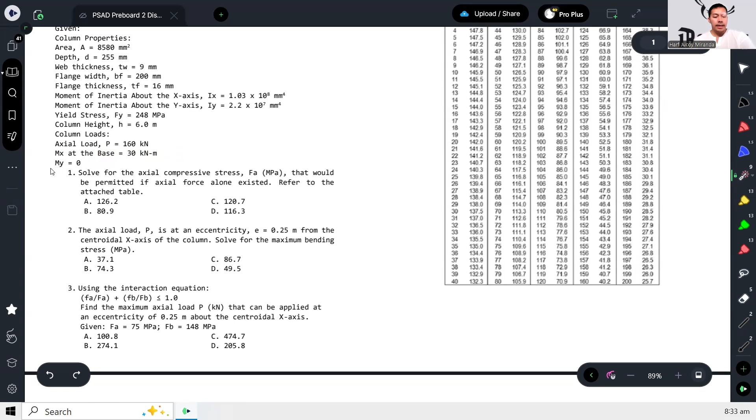So the questions are, solve for the axial compressive stress FA that would be permitted if the axial force alone existed. Refer to the table. So basically in the table, this is telling us that the allowable stress can be calculated using the effective slenderness ratio. So kailangan lang natin kunin yung effective slenderness ratio nitong column na ito para ma-identify natin kung ano yung FA or yung axial stress.

Axial compressive stress. So to do that, we need to define which axis will govern. And remember that in calculating the critical slenderness ratio, we are looking for the largest value of the slenderness ratio. So lagay ko lang dito sa gilid para lang malinaw, ang Kx natin ay 1. Tapos ang Ky natin ay 1.2.

Sinabi niya na yung length ng column, ito, 6 meters. Tapos about the y-axis daw, yung column ay naka-brace sa mid-height. So ibig sabihin, pagdating dito, yung length natin ng column ay kalahati na lang. From 6 meter, magiging 3 meters na lang. Pero dito, it's going to be still 6 meter kasi walang bracing.

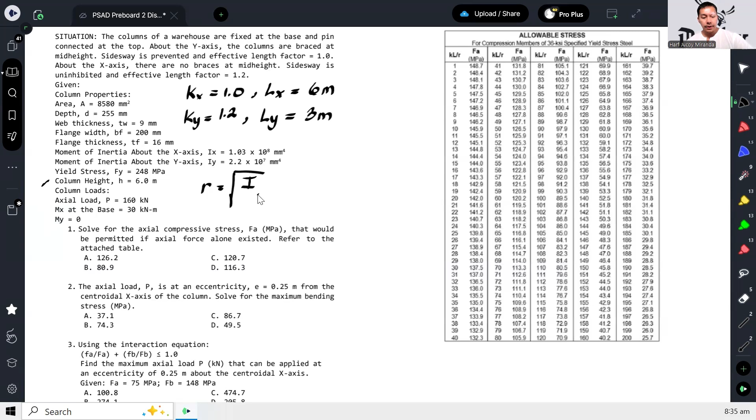Alright, so meron tayong K, may L. So R na lang yung wala. To calculate R, reminder, R is just square root of I over area. So we can define also Rx and Ry. Given naman yung mga I nila. So let's calculate that.

So square root of, let's start with Rx. 1.03 times 10 to the 8, over area, 8,580. So our Rx will be 109.57. And then yung Ry natin, this is 2.2 times 10 to the 7. So 50.64.

Ibig sabihin, let's calculate slenderness ratio about X and slenderness ratio about Y. Nagkabaliktad na side sway is prevented and effective length factor is 1. So dapat dito nga yung 1.2. May dapat dito yung 1.2. Kaya hindi, so dapat ito ay 1.

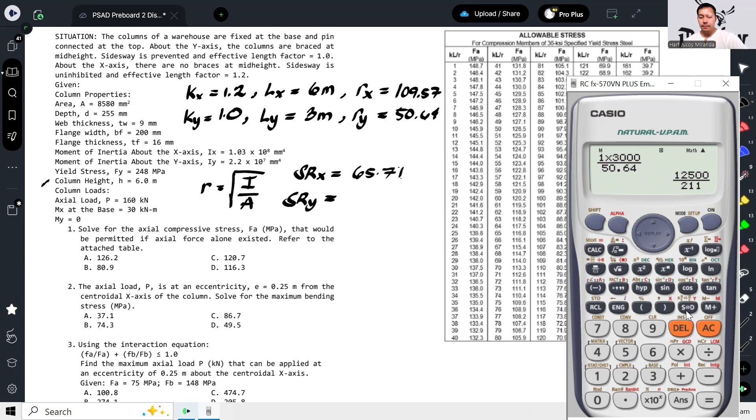If that's the case, this is for slenderness ratio about x-axis, Kx Lx over Rx, so 65.71. And then for Y, we have 3,000 ito, and then this would be 1, 50.64. So this gives us 59.24. Okay, so therefore, in this particular item, the governing or critical slenderness ratio is 65.71.

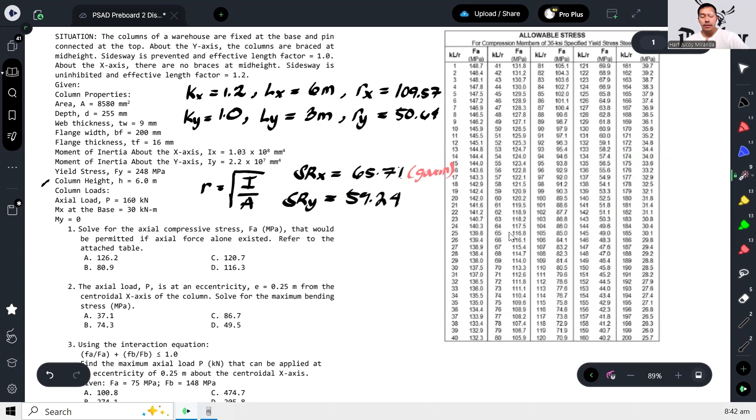So ito yung governing. And dito, ideally, kailangan natin i-interpolate yung values dun sa table. So because this is the governing 65, so it should fall under this item, between 65 and 66. So it will follow na yung FA natin will be between 116.8 at 116.1.

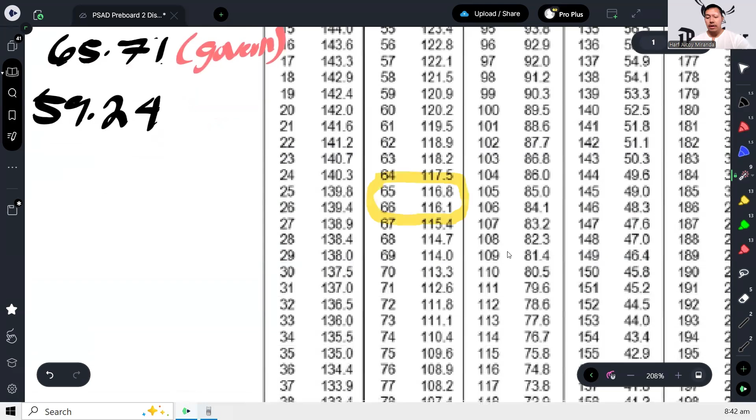Ito naman, pagdating sa board exam, kapag nakuha mo na yung KL over R, tapos binigay yung table, tapos tinanong yung choices, kung makikita nyo sa choices kasi, yung 116 dyan, nag-iisa lang. Kaya, you can already use this as your answer. To save time.

But if you want to interpolate, pwede naman. So again, you can just go to mode statistics. You have 65 and then 66. And then you have 116.8 and then 116.1. Tapos regression, we need y hat. Tapos sa harap niya, lagay mo yung 65.71. And that confirms na yung value natin is 116.3.

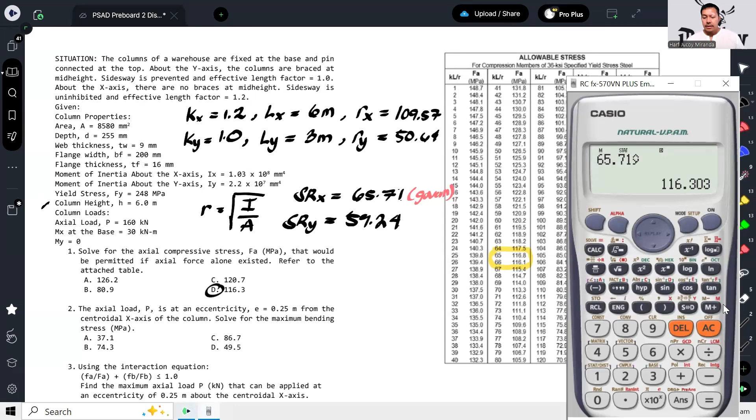So anyway, like I said, kapag nakuha nyo na nga yung critical slenderness ratio at check nyo na kagad yung choices, kapag isa lang naman dun yung nasa range na to, edi yun na yung sagot. Okay, next. The axial load P is at an eccentricity 0.25 meter from the centroidal x-axis of the column. Solve for the maximum bending stress. So ano naman, maximum bending stress. Ibig sabihin ko, ito yung column natin.

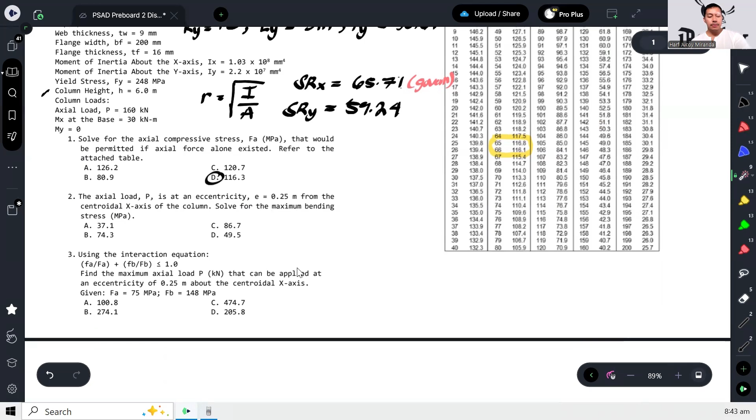Yan yung column natin, ano? So di ba ito yung y-axis niyan? Ito naman yung x-axis niyan.

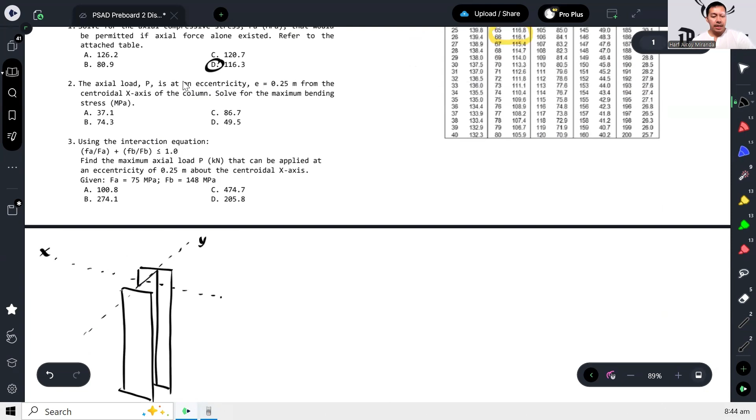Okay, so sabi niya, yung P daw is eccentric from the centroidal x-axis. So ibig sabihin yung P natin is somewhere dito. Okay, so ito yung eccentricity natin.

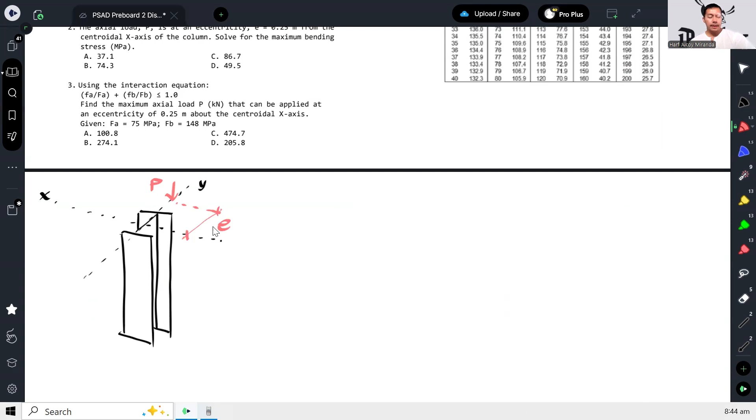Okay, now because of that eccentricity, a moment will be produced here, no? Moment. At yung moment na yon is equal to P times E. Okay, at tinatanong lang sa atin, ano ba yung maximum bending stress?

Okay, so ngayon dito, you have to take note na meron din daw applied moment sa bottom. No, meron din daw moment dito sa bottom, at yun ay 30.

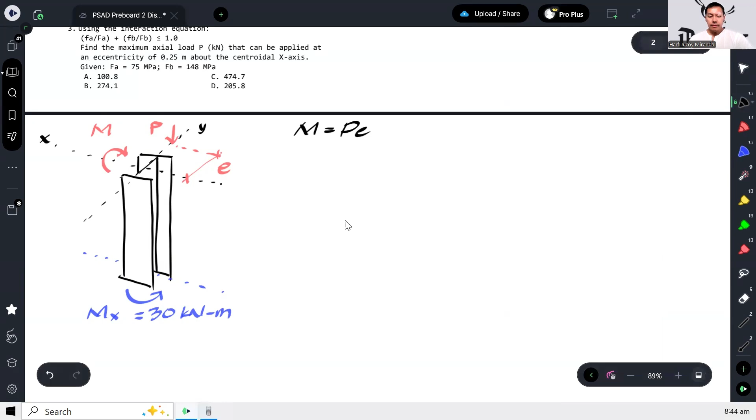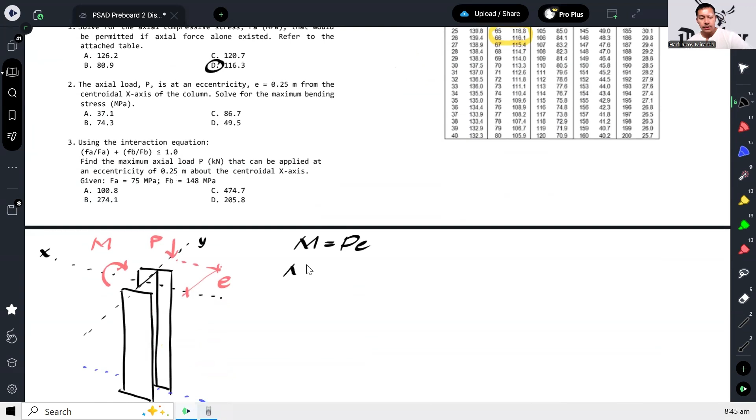Okay, so moment about X, sa bottom. So ngayon, let's check. Dito sa ibabaw, yung P na in-apply, which is 160, now let's calculate the moment it will induce. So 160 multiplied by 0.25 yung eccentricity, this will give us 40 kilonewton meter.

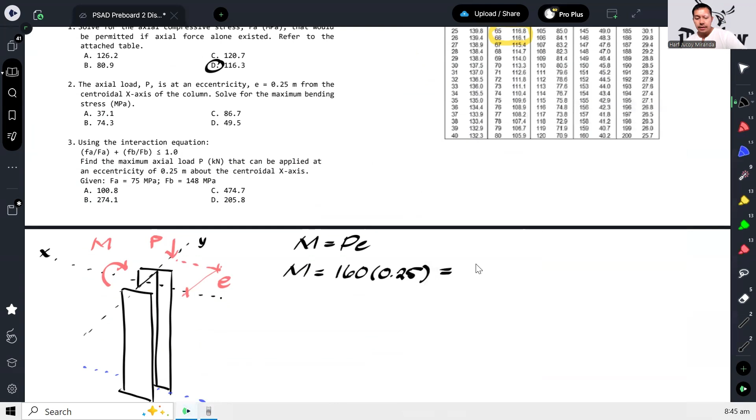Okay, now dito medyo merong confusion yung iba. Paano po ba ang gagawin dyan? May 40 tayo na moment sa ibabaw, tapos meron ding 30 na moment sa ilalim. So pinag-a-add po ba yun? No, ano po ba ang gagawin?

So ang ginagawa po dyan ay you have to compare only. No, kung sino yung mas malaki, yun yung mag-govern na moment. Hindi yan pinag-a-add. Kasi ang idea lang yan guys ay, for example, no? Ito yung column natin.

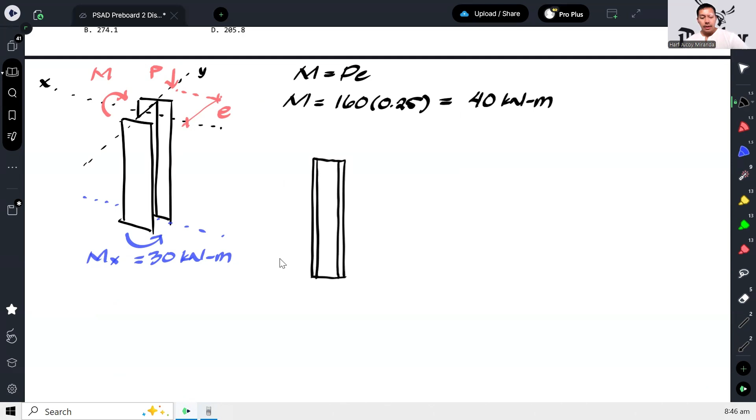Yan kunwari yung column natin, no, sa side view. Bali, meron naka-apply dito na 30. Okay, tapos dito meron ding naka-apply na 40. So kunwari lang, ganyan yung mga directions nila.

Okay, kapag din drawing mo yung moment diagram niya, ang idea lang nun, meron ka ditong moment na, let's say ito yung positive, ito yung negative. So meron ka ditong moment na positive, 40. Tapos dito meron kang moment na also positive, 30.

Ayan, okay? So ganyan lang yung moment diagram niya. No, so parang ito yung moment diagram. Okay, so ganyan yung idea nun. Alright, so ibig sabihin, hanapin mo lang yung maximum moment.

So ngayon, you might be thinking, paano kung magkaiba ng direction? Paano kung halimbawa, iba yung direction ng ibabaw tsaka sa ilalim? Well, mangyayari lang din ulit. Pwede rin kasing ganito yung maging moment diagram mo.

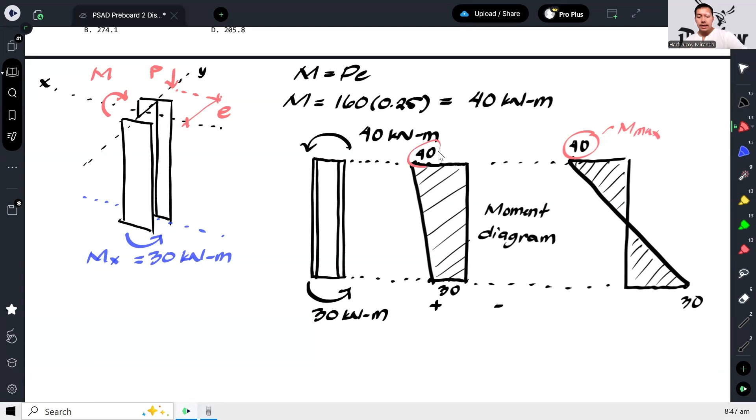Halimbawa, ito yung 40, tapos kunyari, iba yung direction ng 30, o di na sa kabila yun. Kasi ito pa rin yung moment diagram natin. And the point is, in our moment diagram, we are just looking for the maximum moment. And in this case, ito yung maximum moment natin. Regardless if this is of the same direction or different direction. Yun lang yung idea nun.

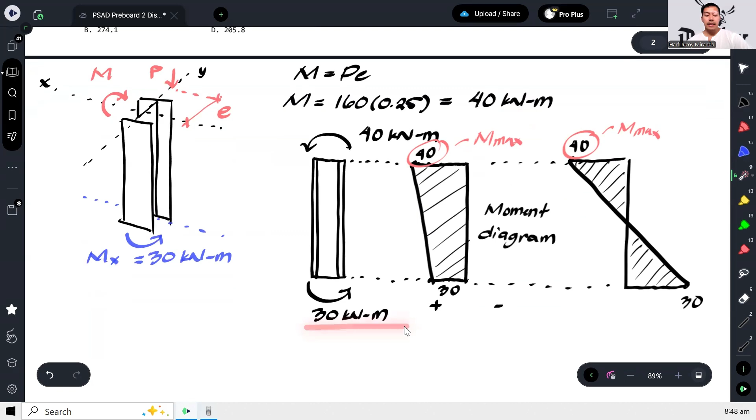So ibig sabihin, guys, ang tatandaan natin dito, kapag ang nakuha ko na moment, mas mababa dun sa given na applied moment, o di yung applied moment yung mag-govern kasi siya yung mas malaki yung reaction, no, siya yung mas malaking bending moment. Alright, so therefore, from here, all we have to do is to calculate the maximum bending stress.

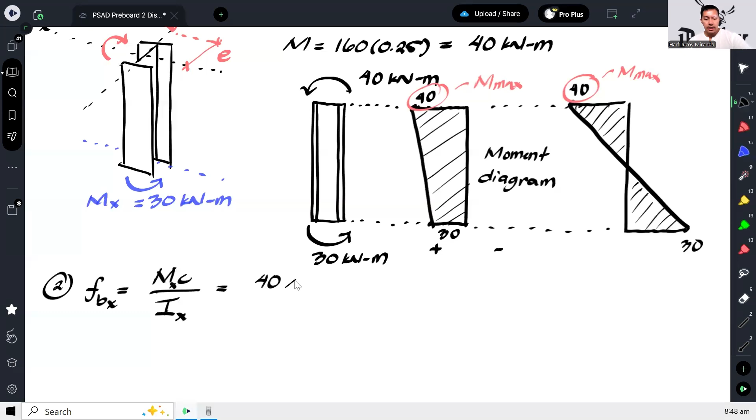So yun lang yung tinatanong, no? Bending stress. So for number 2, bali MC over I lang yun. Okay, and of course, dahil ito ay bending about x-axis, ito ay x. Parehas, no? Okay, so ang moment na gagamitin is yung 40. Gawin natin Newton millimeter. Tapos yung C natin dyan, D over 2, ano? Okay, kasi wide flange yan eh.

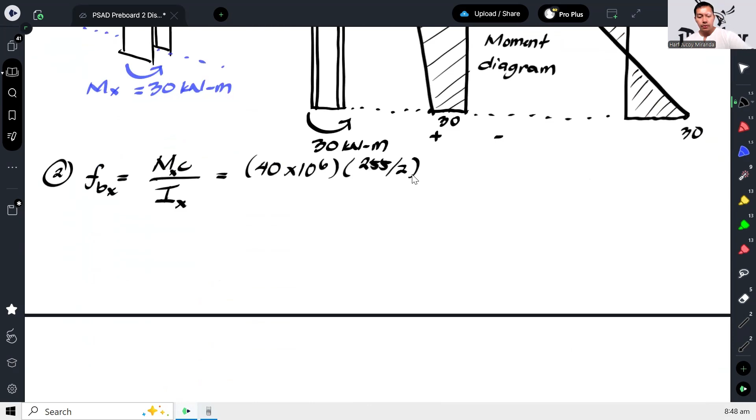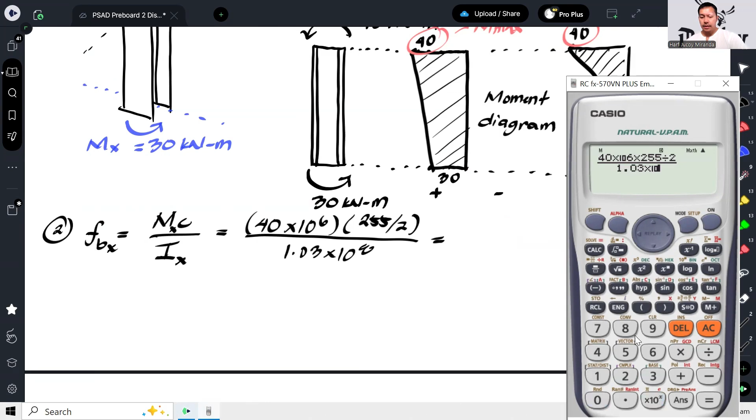So ito yung C natin, D over 2. Okay, ang D natin ay 255, 255 over 2, over IX. IX is 1.03. So we have 40 million over 1.03 times 10 to the 8. And that gives us 49.51.

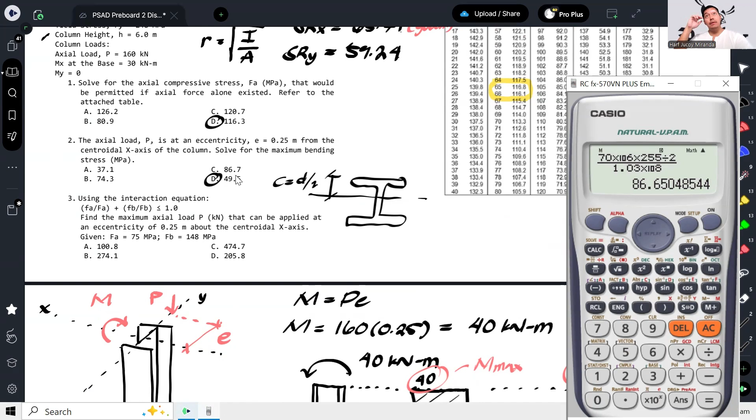Okay, so ingat kayo ha, kasi pag pinag-add nyo yun, I think nasa choices din yun. So 40 plus 30 is 70. Ayan, so ayan, may 86 din doon, no? So medyo kailangan natin mag-ingat doon sa concept na yun. Again, kung mas malaki ang naging moment sa base compared doon sa moment induced by the eccentric force, yun yung mag-govern kasi yun yung maximum moment, no?

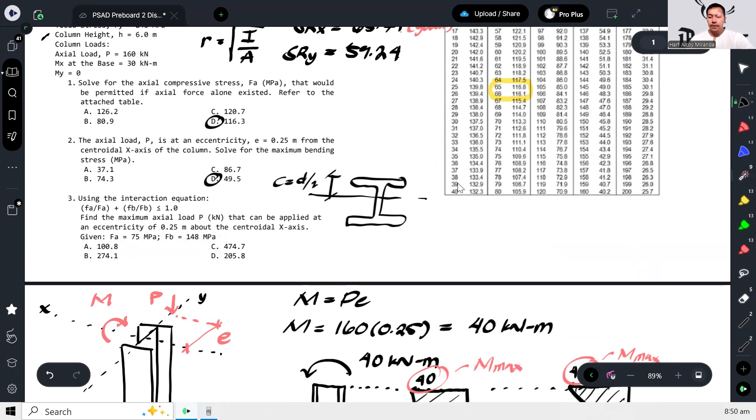Okay, next, si maximum yung tinatanong, no? Next, using the interaction equation, find the maximum axial load P that can be applied at an eccentricity of 0.25 about the centroidal x-axis. You're given the following allowable stresses. Okay, so ngayon naman, parang ano siya, combined na siya, combined axial and bending.

So bali yung, define muna natin, yung actual axial stress natin would be P over A, di ba? Ganyan lang. Tapos yung actual bending stress natin, MC over I. Tapos yung M natin is P times E. Tapos yung C natin ay D over 2. Tapos ito as is. So ganyan lang, no?

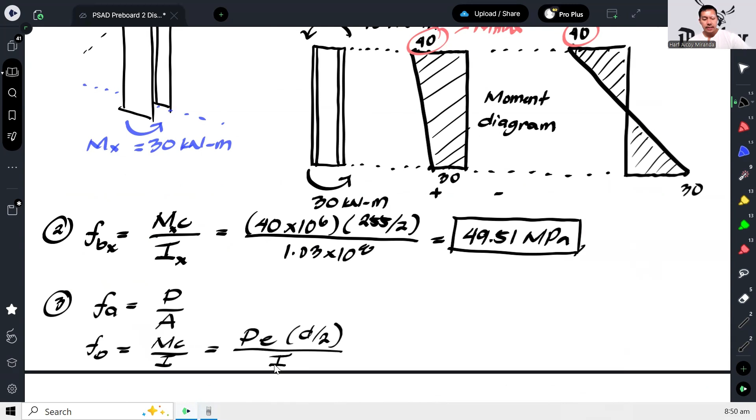Tapos ipasok natin lahat dun sa interaction formula. So ang interaction formula, ito yung para sa axial stress plus ito naman yung para sa bending stress. Okay, so ito, gawin natin P. I'm assuming na itong P na hinahanap ko ay naka-kilo-newton. So gawin natin Newton over area. So yung area natin is 8580. So megapascal to, no? Over FA.

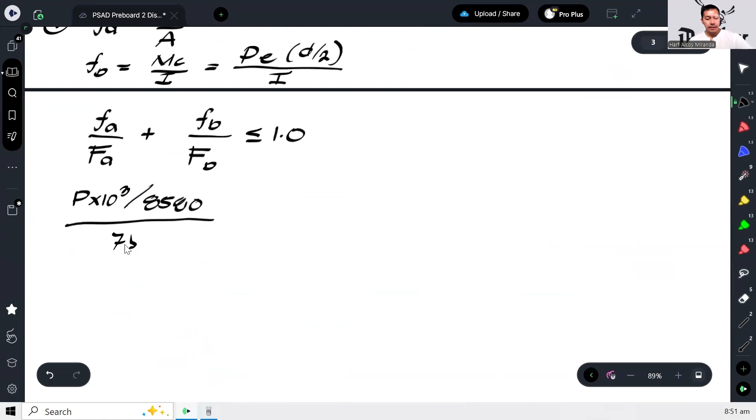So yung FA na sinabi for number 3 is 75. Okay, plus allowable stress. So P, ganun ulit, gawin natin tong Newton. Multiply natin ng E. So yung binigay na E is 250 millimeters. Tapos yung D ay 255 over 2, over I, 1.03 times 10 to the 8, over yung allowable stress, which is 148.

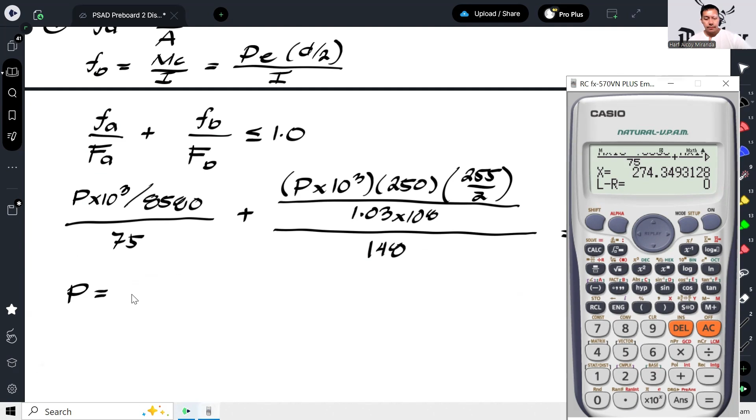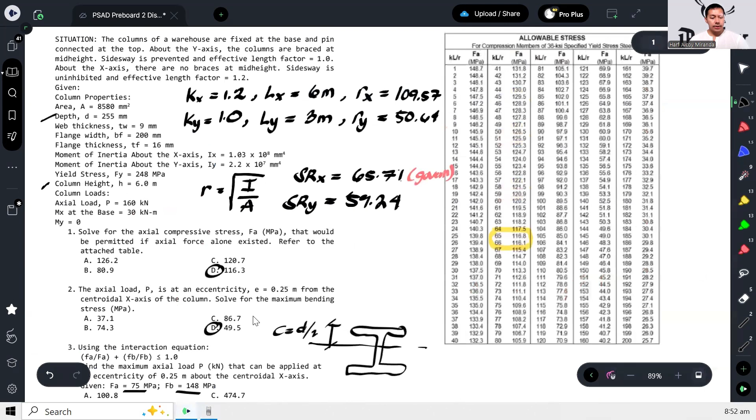And to solve for the maximum value of P, we'll need to maximize the interaction equation to 1. Okay, and solving for P, yan natin, should give us... okay, so that gives us 274.35. That is in kilonewtons, and that will be our answer. Okay, so for number 3, that is letter B.

Okay, and that's how we solve this particular item.